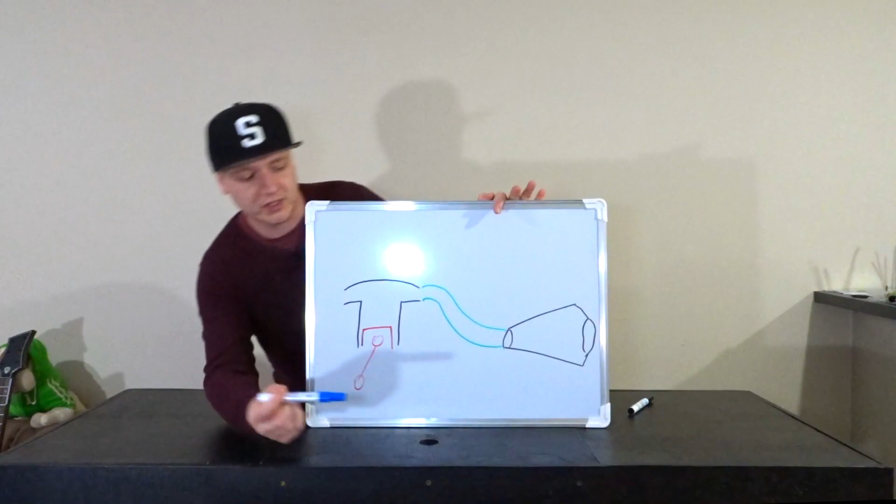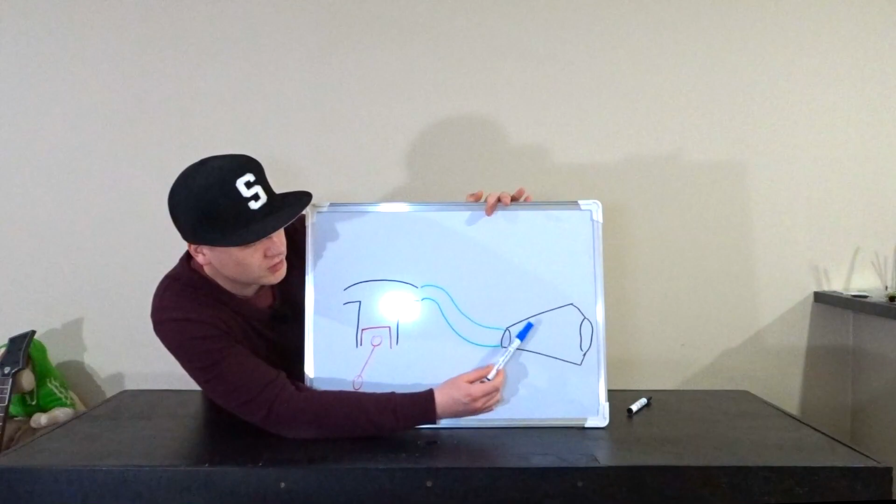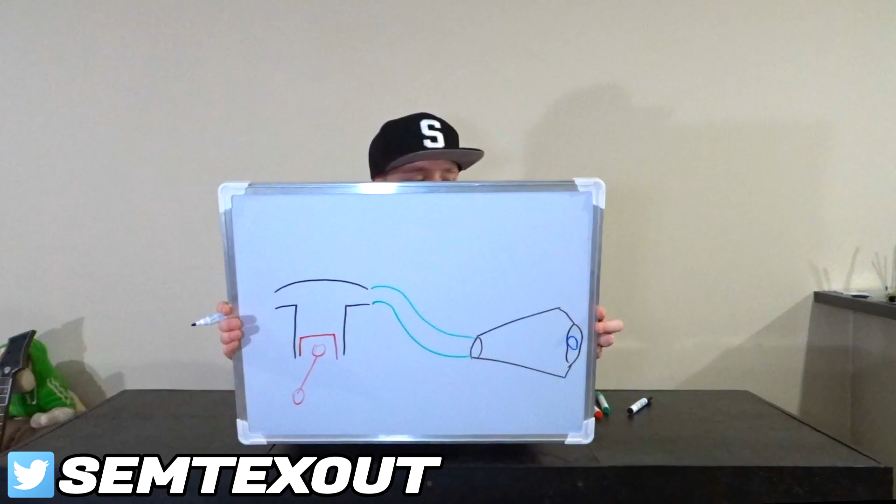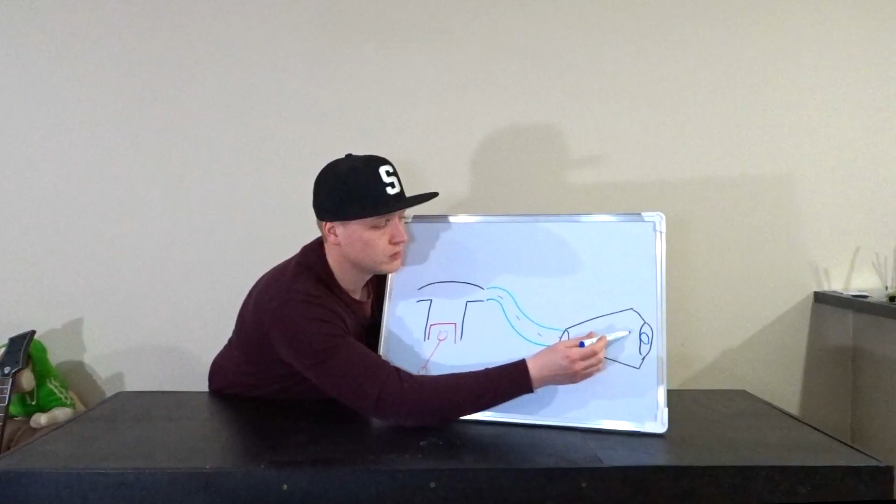I'm gonna take my board and draw a simple diagram, I'm not the best drawer. So this is my drawing: as you can see, this is our piston, this is our cylinder head, our exhaust pipe, and our exhaust tip. Now I changed out this part, the exhaust, because the old exhaust had a much smaller exit, like this, much smaller. What happens when you have an open exhaust: the exhaust gases flow much more quickly to the atmosphere. And here is your exhaust valve, and here is your inlet valve, like this.

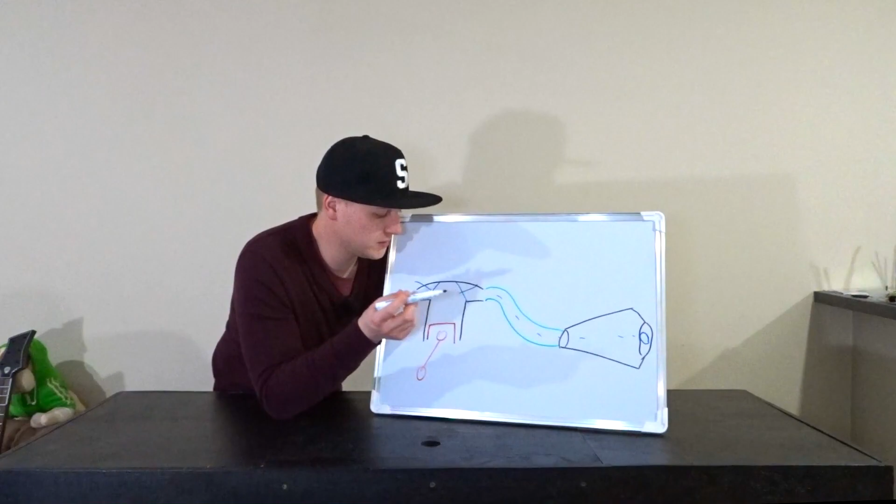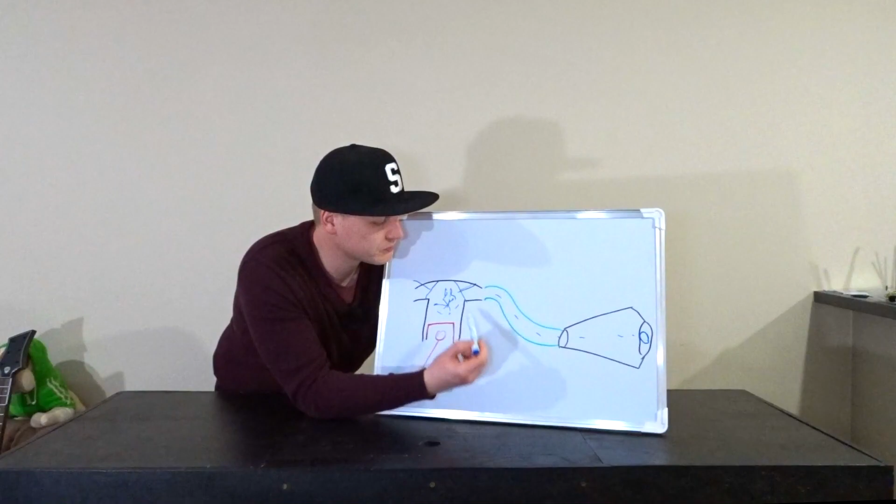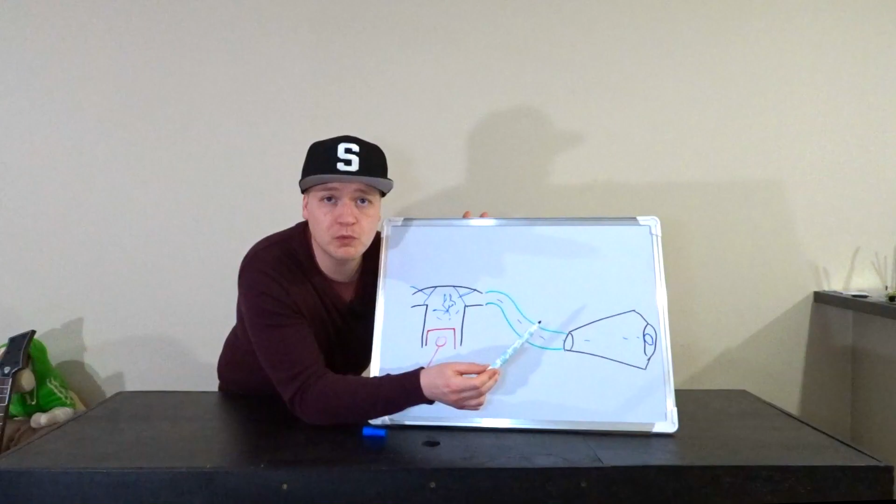Now the piston is at the explosion point. Right here is the explosion. Your exhaust valve opens up and your exhaust gases flow out. Now what happens when the exhaust is open and free? The exhaust gas moves much more quicker than normally with the stock exhaust.

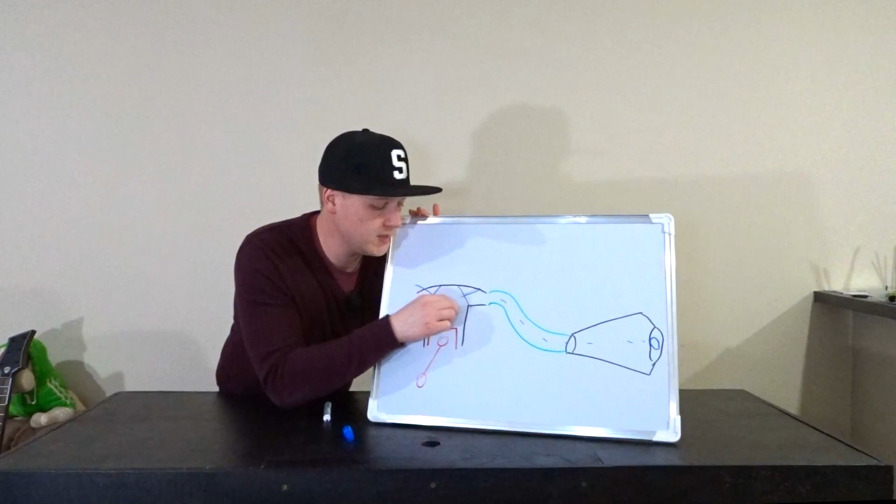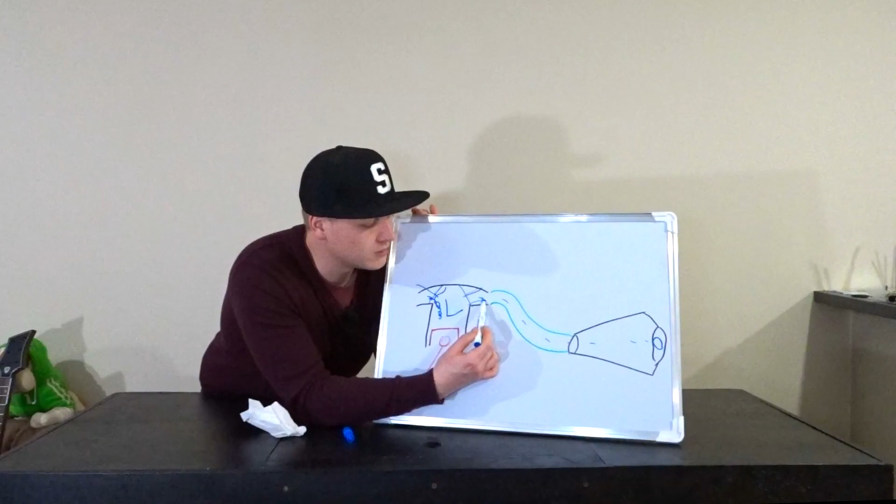So what happens? All the exhaust gas goes away, and if you have a fast flowing exhaust, then you create a vacuum inside your cylinder, and when your inlet valve opens and your fuel mixture comes in, because you have a negative pressure in here, some of the fuel goes out in your exhaust system. Now this happens fairly quickly, but that is what backfire is.

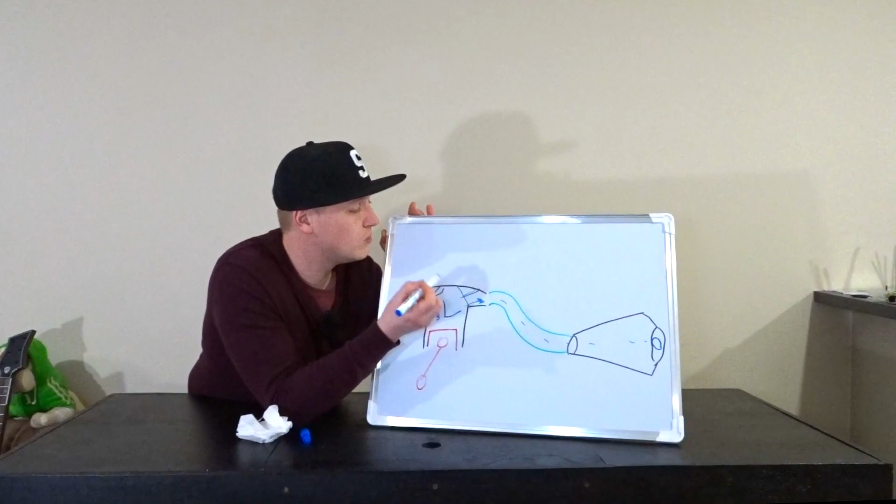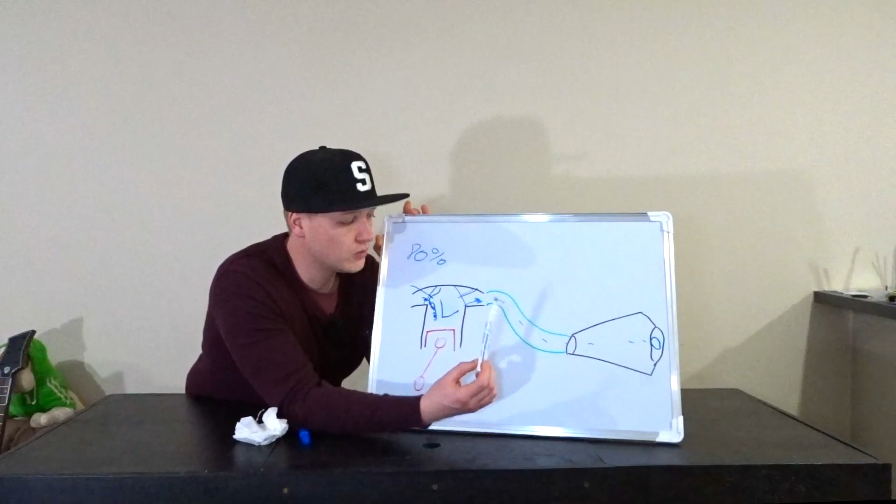In most of my videos I complained about the backfire. It's cool backfire, but you see what's happening. So if you have fuel that goes into your exhaust system, you maybe have 80% of fuel in your cylinder head. That means 80% power. So this is what happens when you have your exhaust wrap with your high temperature air inside your exhaust and your open exhaust. That is why you lose power when you do this modification.

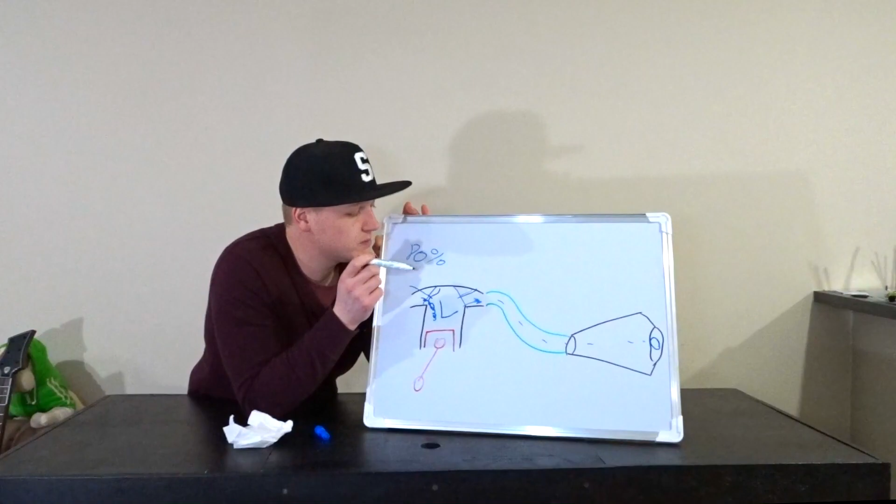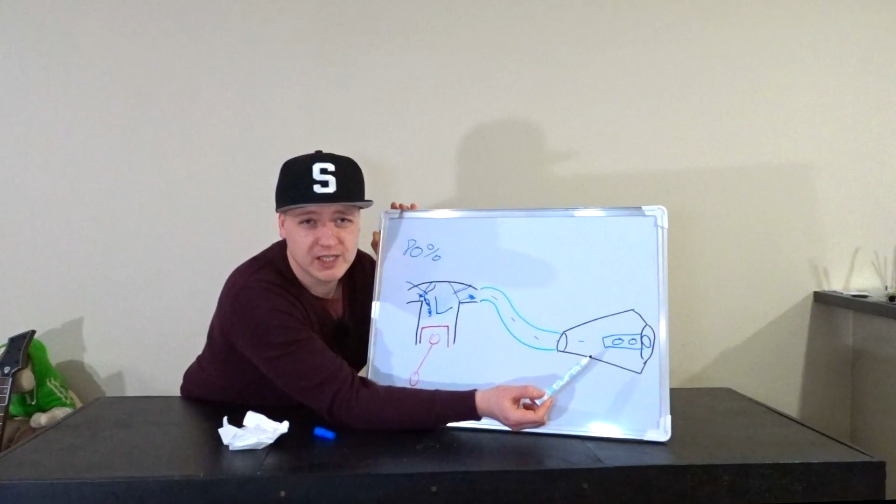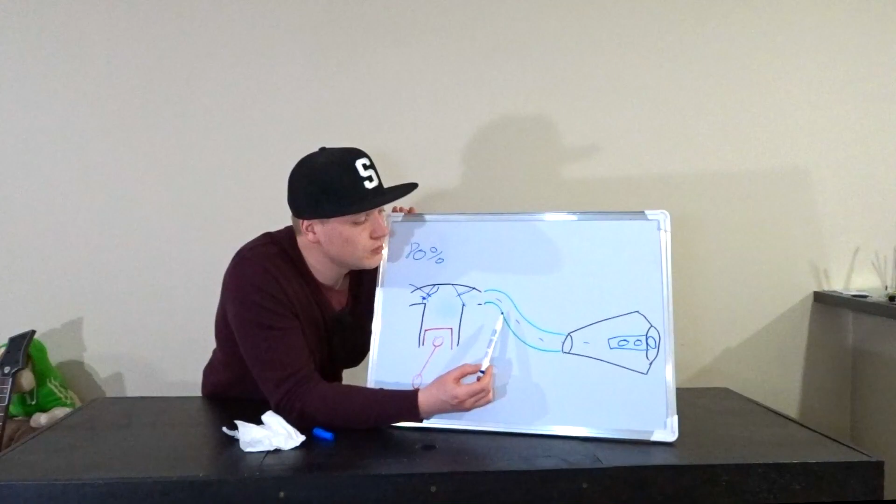Now the third mod that I did, I put in a silencer. Here is my silencer. Now what happens when you put in a silencer? Everything goes the same. You have your explosion, your exhaust valve opens, your exhaust gases go out into your tube, into your exhaust. Oh, restriction. Your silencer restricts the airflow.

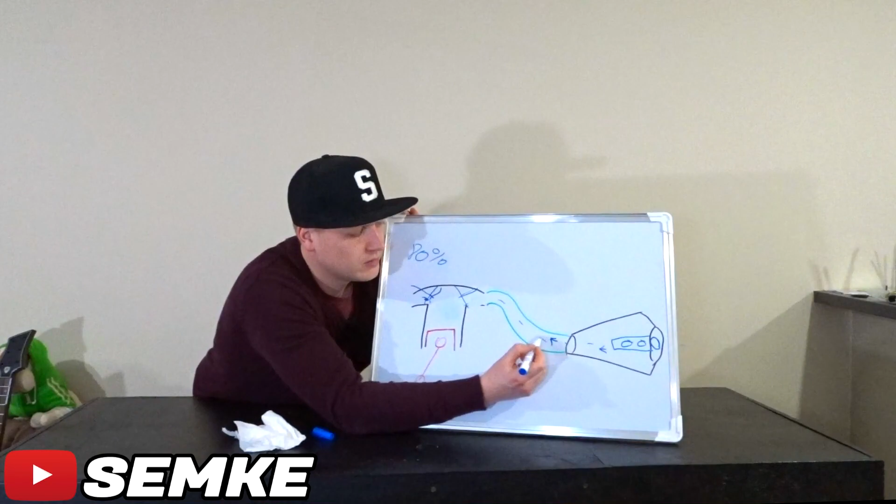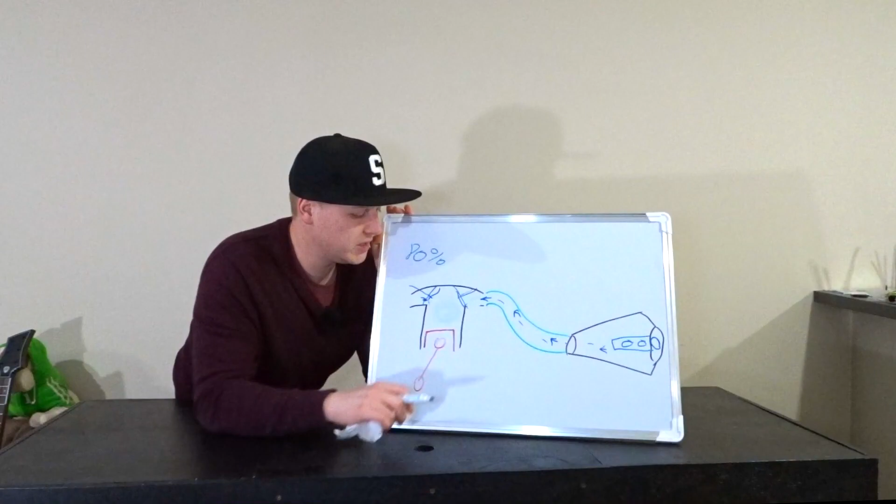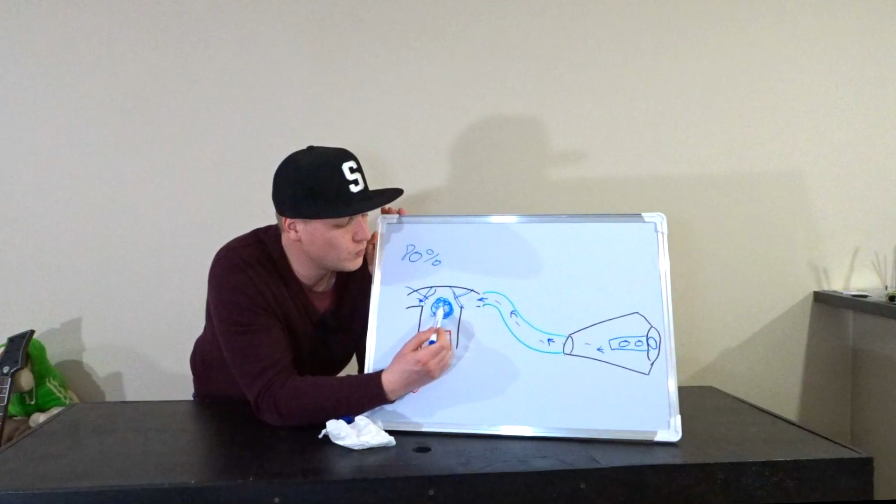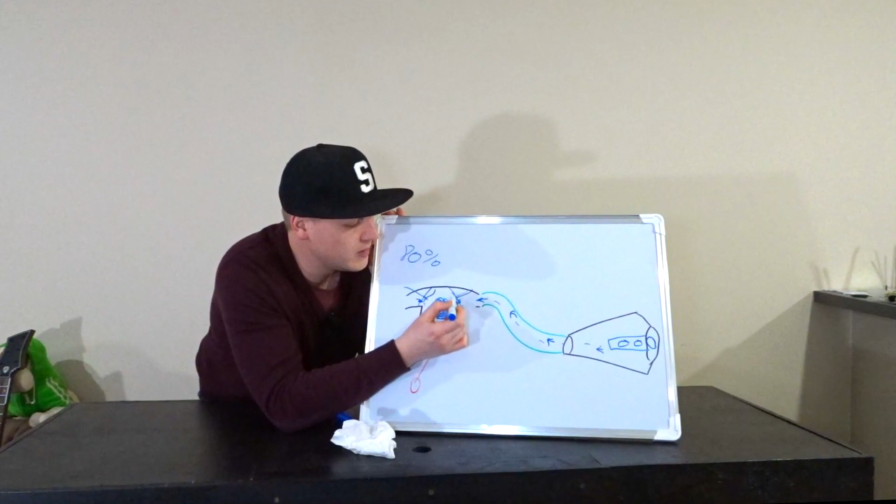So what happens? It bounces back this way. And I'm talking about milliseconds. While your exhaust gas is bouncing back, the negative pressure, the vacuum pressure that was here, is no longer here, because it doesn't create a vacuum, because the pulsation of the explosion bounces back, and before your cylinder head is filled up with new fresh fuel, the pulsation goes back, no fuel can go inside the exhaust. It closes up, and then you have 100% pure new fuel inside your cylinder head, and you get 100% power, acceleration and speed.

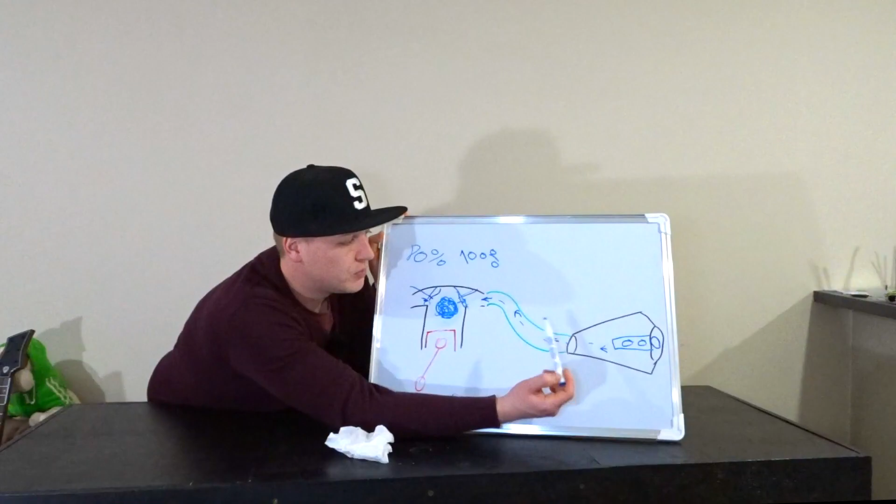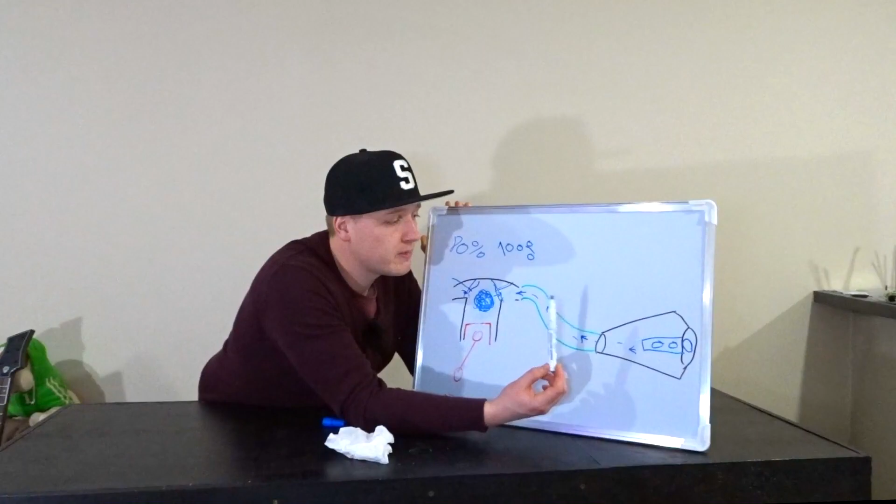So that is why I put on new exhaust wrap, put on a better flowing exhaust, and I put in a silencer. Now let's recap what is happening. Because we have a free flowing exhaust, we gain acceleration. We build up speed more and we build it up much more faster. The exhaust wrap makes sure our exhaust gases are hot enough so they can free flow much better.

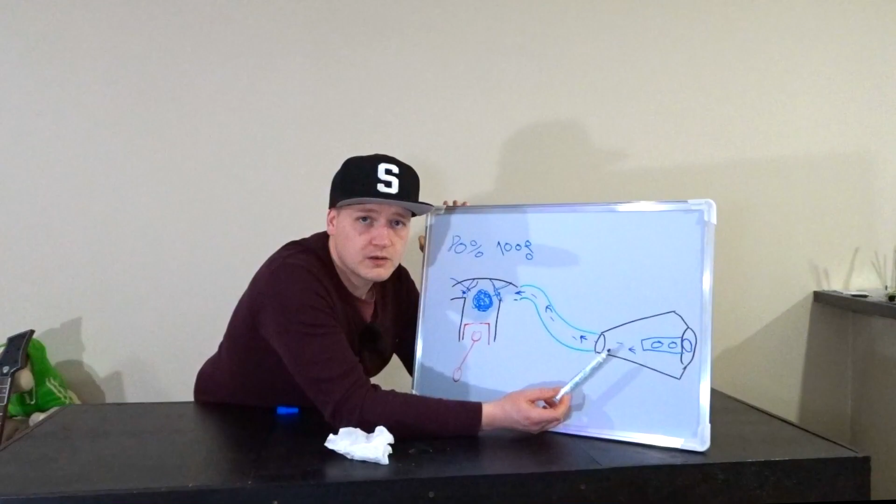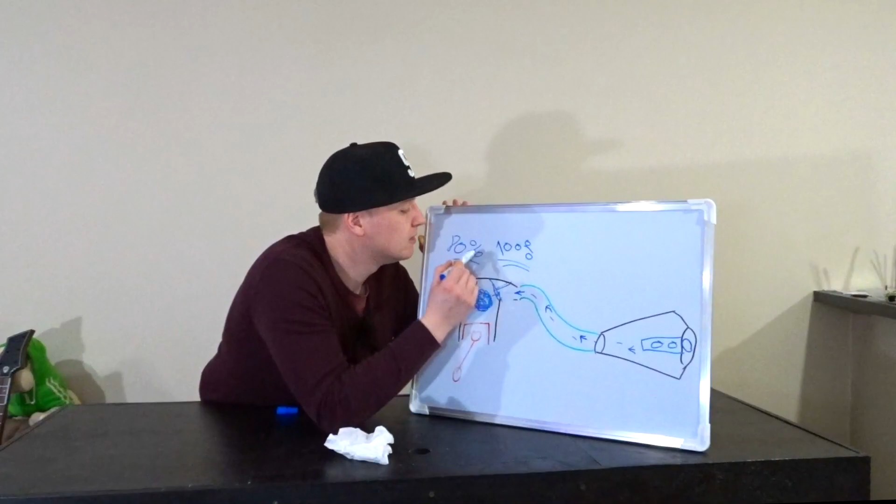The silencer prevents a vacuum being created inside the cylinder head, so we don't lose fuel inside of our exhaust system, and we have 100% power and not 80. So as you can see, there's much more to it than just slapping on a new exhaust tip and gaining power. You have to know how it works, and yeah, that's what I'm here for.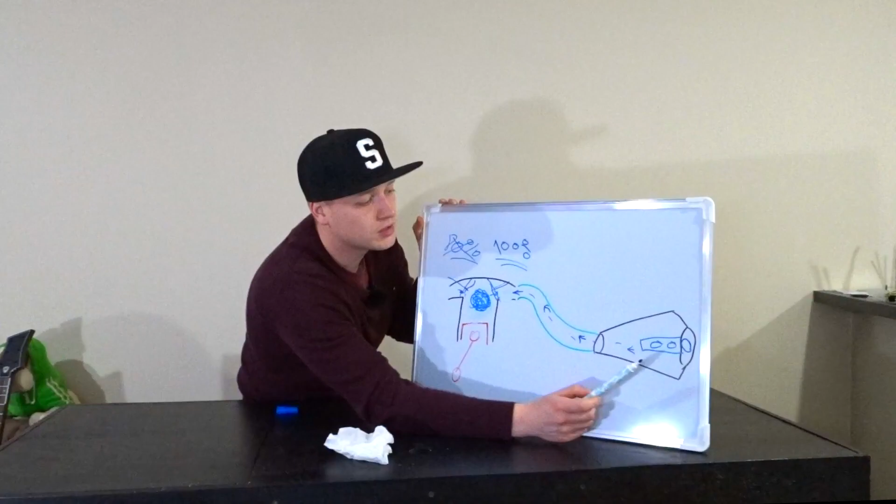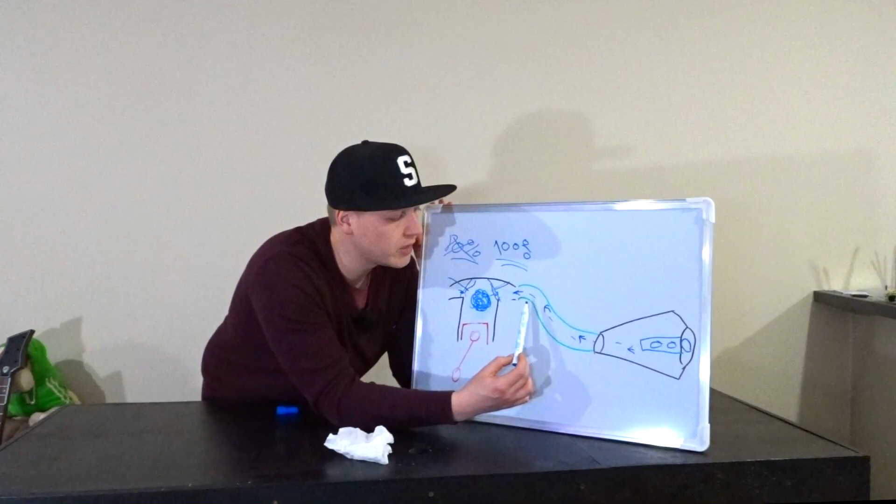That's why I do these tests, and I rode along with stock exhaust, heat wrap, no heat wrap, new exhaust, open exhaust, and silencer. And this is the best combination that you can have. If you eliminate one of them, it's all over. Remove the heat wrap, your air is not hot enough, your gases will not free flow enough.

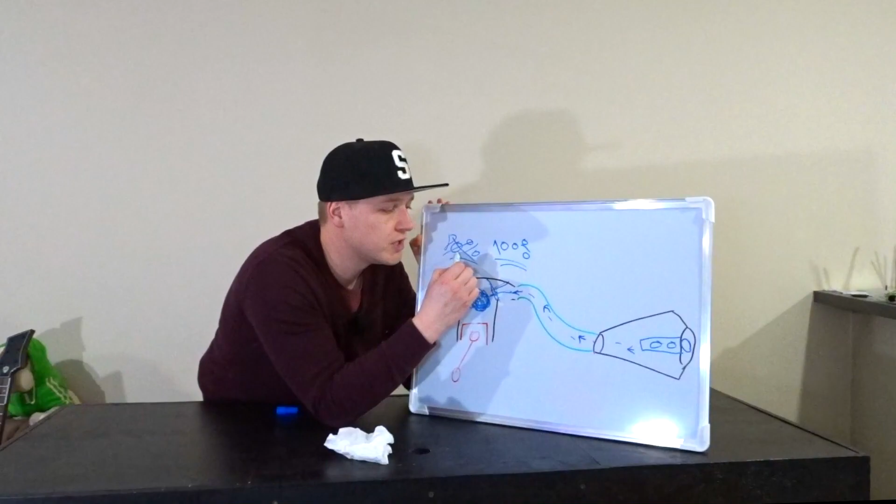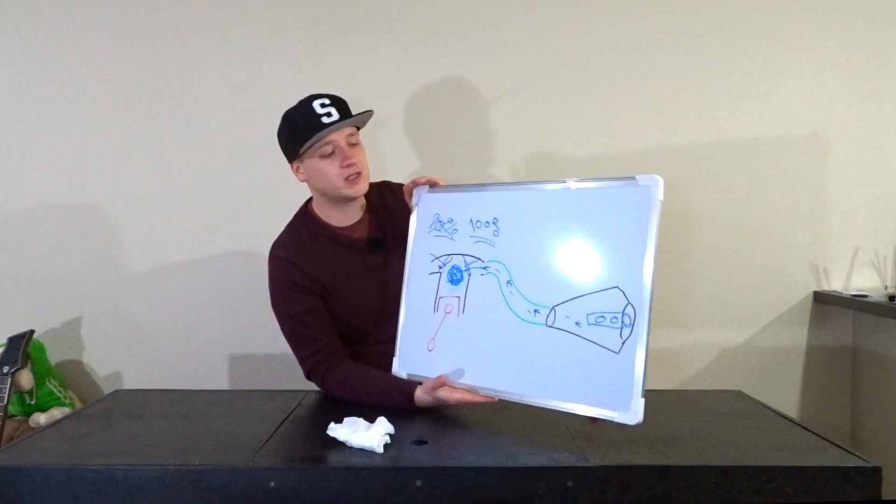Remove the silencer, you will get gasoline in your exhaust pipe, creating backfire, losing power. You put on the stock exhaust, you will be restricted from the exit hole of your exhaust, not getting enough acceleration. So a big explanation, this is what I worked on for like a whole year, testing out, buying new parts, getting the information inside my head, the right mind state and what I want to do with the bike.

Pretty amazing if you look at it, that so much stuff can happen when you remove or add something to your exhaust. Many people think, oh, I'm gonna slap on a new exhaust, hey, I'm gonna gain more power. But if you look at it, it is much harder than it looks, and you appreciate the research that goes in when manufacturers make a new bike.

I try to explain it the best way I can. I know it can be tricky. You have to know how the engine works and how exhaust flow goes and temperatures and pulsation and all that stuff. But yeah, hope you learned something. Hope you can get more power and more acceleration out of your bike. My bike is now at the perfect amount of flow and less backfire, pretty much no backfire. Sometimes it will go off, but not like it used to when it fired every 5 minutes.